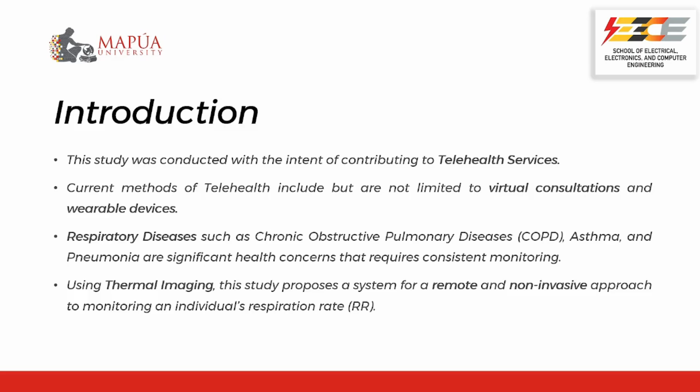Telehealth or telemedicine enables remote healthcare in the comfort of homes using video conferences as a medium between the patient and the medical professional. It is also critical for rural areas or any other location far from clinical facilities. To this day, it remains relevant due to its accessibility and convenience.

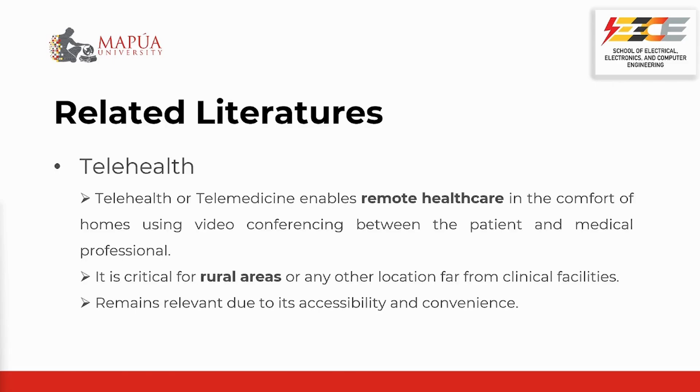Chronic illnesses, such as chronic respiratory diseases such as COPD, affect over 380 million people globally. Over 3 million lives are cut short due to its silent and non-communicable nature, making it the world's fourth leading cause of death. Other respiratory diseases such as asthma, pneumonia, and even sleep apnea require consistent monitoring.

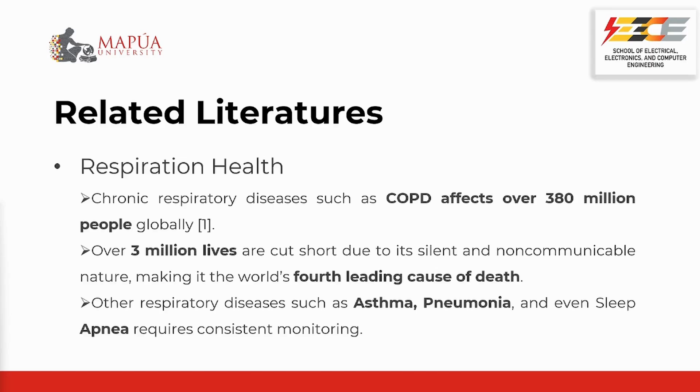There are studies regarding derivation of respiration rate, such as by Dela Cruz et al., where they use pulse oximetry to derive respiration rate from the heart rate. The signal processing techniques they use, such as the fast Fourier transform and Symlet wavelet transform, were used to estimate the heart rate and respiration rate. It is also worth mentioning that there has been little to no mention of studies with regards to using MLX, as they have strictly limited options to more expensive and high-end models.

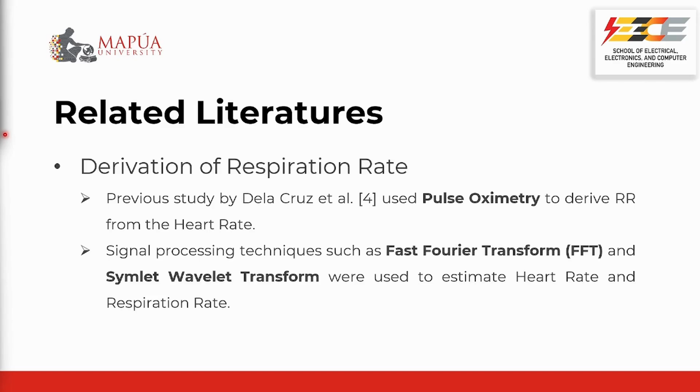Virtual consultations are not enough for effective respiration, health checkups, and patient assessment, since vital signs assessment and physical examination are used with medical tools to accurately assess patient health, which current telehealth services lack. Other high-end monitoring devices are usually used in hospitals or other specialized clinics.

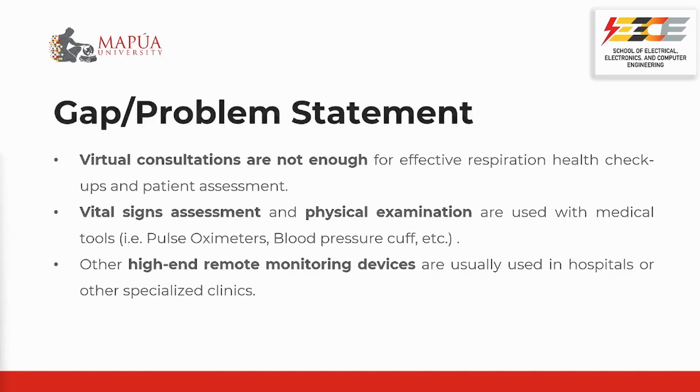The main purpose of this research is to develop a vision-based respiratory rate monitoring system using a thermal camera for added temperature reading. Specific objectives include the following: device calibration and determination of the optimum location of the thermal camera in the monitoring setup, to observe the changes in temperature waveform as the patient breathes in and out and collect temperature data. And lastly, extract and derive respiration rate from the collected temperature signal data.

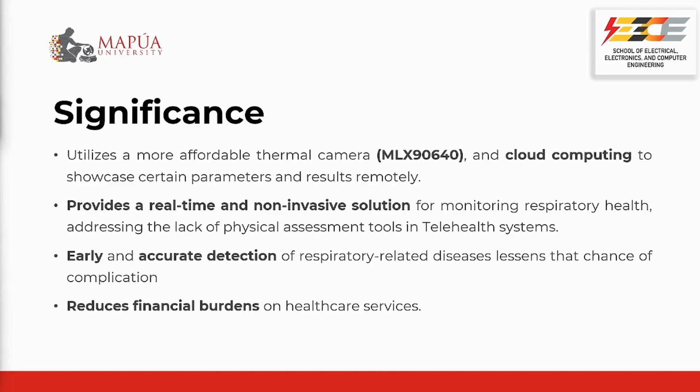The significance of our study is that it utilizes a more affordable thermal camera, which is the MLX90640, and cloud computing to showcase certain parameters and results remotely. It provides a real-time and non-invasive solution for monitoring respiratory health and addressing the lack of physical assessment tools in telehealth services. Also, as respiratory-related deaths continue to rise, primarily from COPD, early and accurate detection of respiratory-related diseases lessens the chance of complication, reducing the financial burden on healthcare services.

For our delimitations, this study will mainly focus on creating an ESP32-based infrared camera. The results will be compared to the conventional approach of determining respiration rate by manual counting through the rise and fall of the chest or abdomen. The RMSE score and percentage difference will be determined for the accuracy of our proposed system. The study is limited to providing quantitative data on respiratory rate through thermal imaging. Other physiological parameters such as blood pressure and acidity levels would not be included.

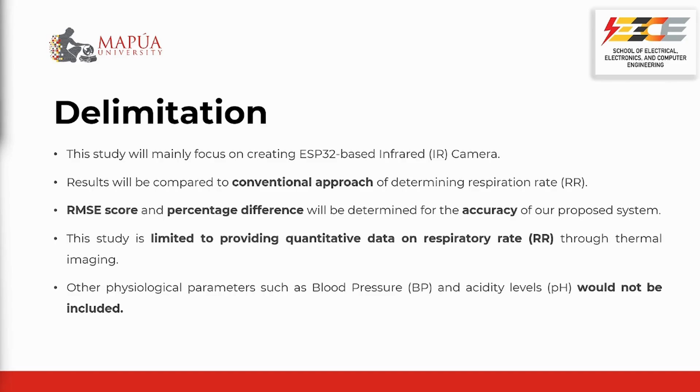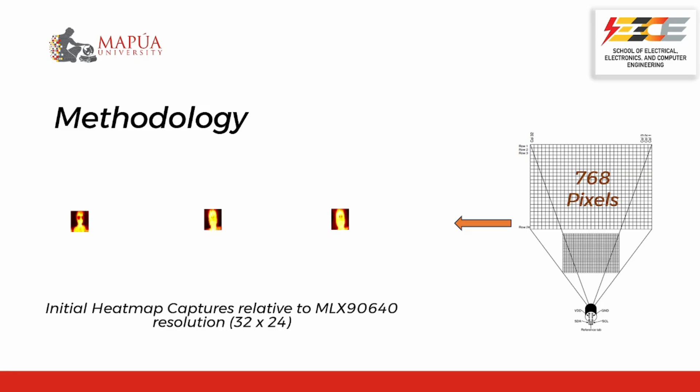Using Python's OpenCV, we can reshape these values into a heat map. However, due to the aforementioned resolution, the camera's initial heatmap captures are too small and not ideal for determining our region of interest, which in this case is the nasal region. We have decided to resize them to 170 by 205 pixels, giving us a clearer visualization of where the nasal region is located. A total of 1,690 thermal captures of similar size was used as our dataset for the nasal detecting YOLOv8 model, all of which were manually annotated using Roboflow.

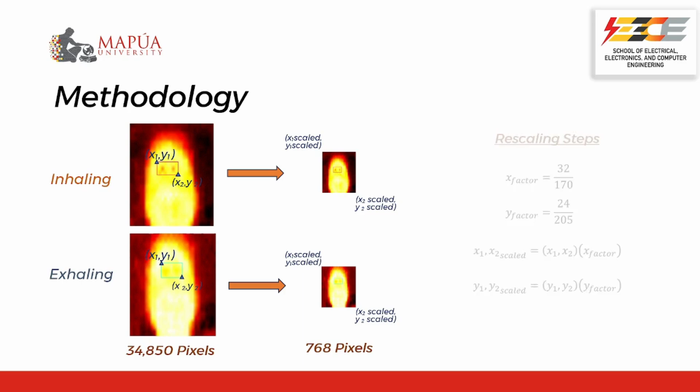So these are examples of the cropped images of the nasal region relative to the 32 by 24 resolution of MLX90640. As the system operates, it continuously captures heat map images of the nasal region. Each has distinct arrays representing the individual temperatures of their corresponding pixels. The size of these arrays varies based on the distance of the nose from the camera and the size of the patient's nose.

Whenever a detection occurs, we calculate the average of these temperatures and store them in a separate array. This array serves solely as a storage unit for future calculations. After 65 detections, the system invokes our custom respiration rate calculation function along with Python's pop function. The pop function ensures that the array maintains a maximum of 65 elements by removing the oldest entry. This allows the array to accommodate the latest average temperature readings of the nasal region while preserving efficiency.

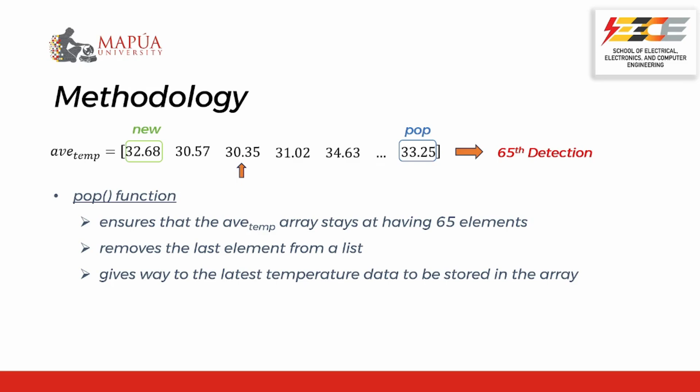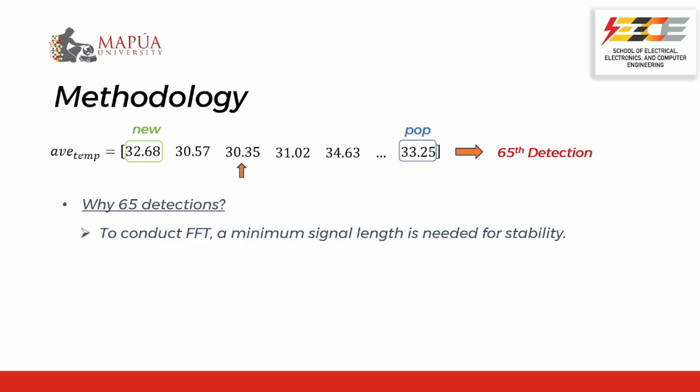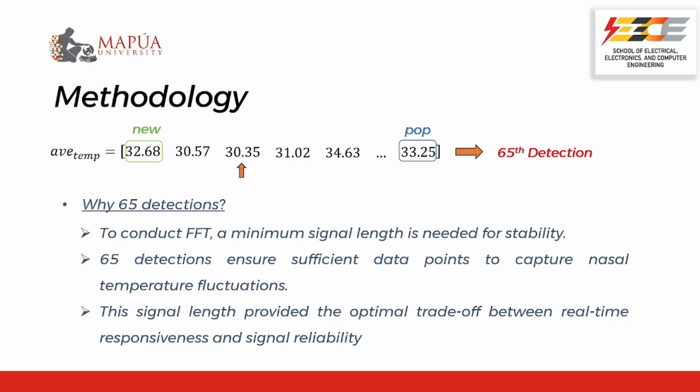We chose a minimum of 65 detections before calculating the respiration rate for the following reasons. A sufficient amount of signal length is necessary to perform an effective fast Fourier transform analysis, and with 65 detections, temperature fluctuations are adequately captured. And with this threshold, we achieved an optimal trade-off between real-time responsiveness and signal reliability. We now move to the final section of the flowchart. Here is an example of the acquired raw temperature signals over a 2-minute period. Each data point here signifies a nasal detection.

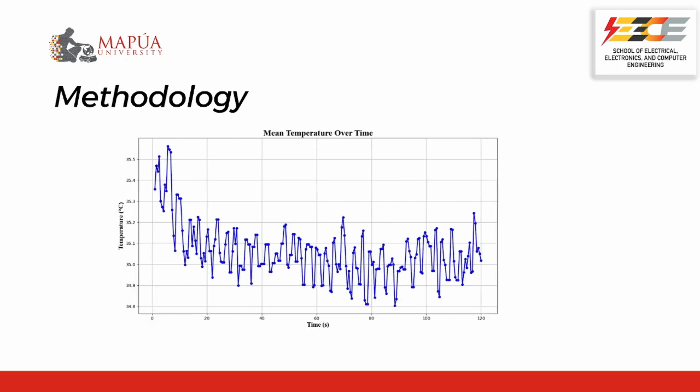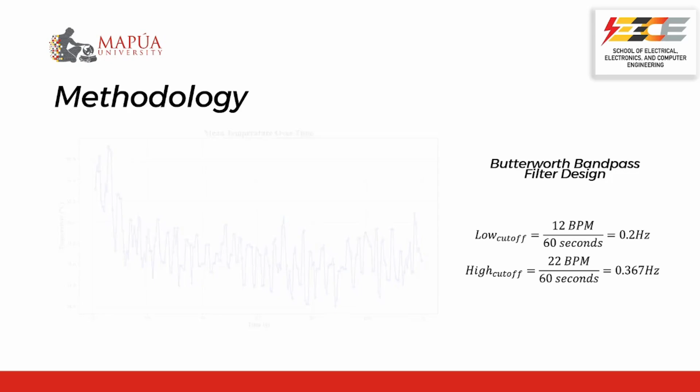The Butterworth bandpass filter cutoff frequencies were selected based on the normal adult respiratory rate of 12 to 20 breaths per minute, corresponding to 0.2 Hz to 0.33 Hz. However, to account for irregular or faster breathing patterns, we opted to extend to 22 bpm or 0.367 Hz to ensure that respiratory-related signals are captured while filtering out noise, enabling accurate analysis of temperature variations associated with respiration. This is the resulting output after applying the bandpass filter.

The next step involves performing the fast Fourier transform analysis to convert the time signal into a frequency domain. We applied a sliding window approach with a window size of 30 seconds and a step size of 10 seconds. This means that FFT analysis was performed on every 30-second segment of data. Afterwards, we shift for another 10 seconds before repeating the analysis. This process continues until the end of the 2-minute acquisition period.

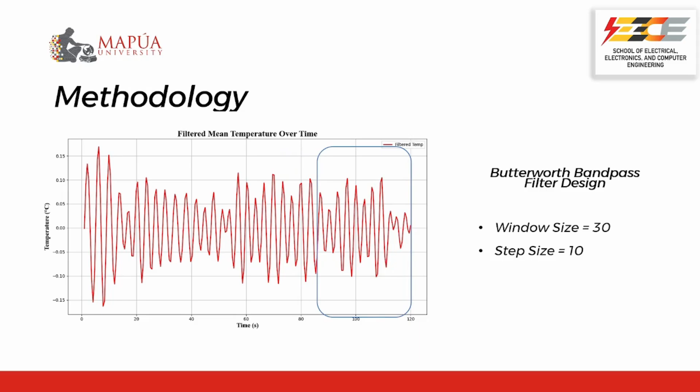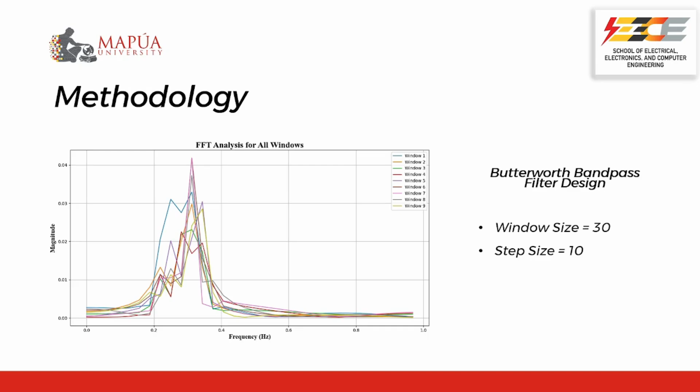Here are the resulting frequency magnitudes after signal filtering. The peak frequencies here, within the bandpass range, correspond to the respiratory rate in terms of Hertz. To convert this into BPM, we multiply these peak frequencies by 60 in order to get the respiration rate. And then finally here, we can see the respiration rate derived from the peak frequencies, providing us a means of monitoring a patient's breathing patterns over time.

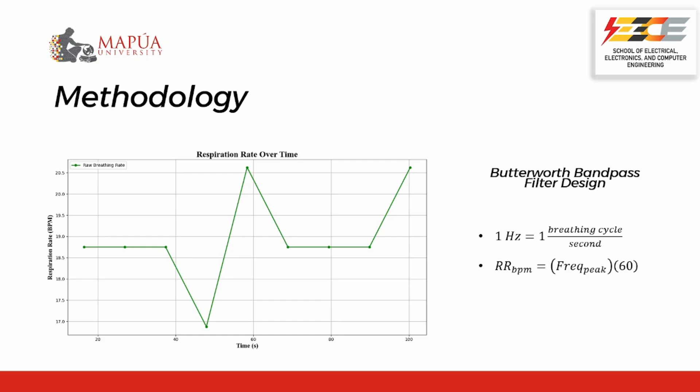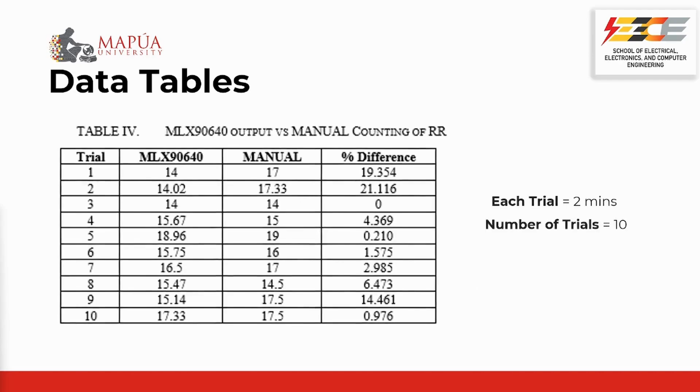Here is the result of our data testing, in which there are a total of 10 trials wherein each trial consists of 2 minutes. As you can see, the lowest percent difference that we achieve is around 0.21%. Significant deviations were observed in trials 1, 2, and 9 due to factors such as erratic patient movement, variability in breathing patterns, environmental noise, and the general hardware limitations of the MLX90640 thermal camera. Despite these challenges, however, the proposed thermal system achieved an RMSE score of 1.651 when compared to the conventional method of manually counting the rise and fall of a person's chest.

In conclusion, we successfully met the stated objectives of observing the temperature fluctuations in the nasal region, extracting raw temperature signals to derive respiration patterns, and providing visual and audio cues to effectively communicate system data to the user. The overall testing phase achieved an RMSE score of 1.651, with one test showing a difference as low as 0.21% compared to manual counting.

We recommend incorporating an industry-grade medical device for respiratory monitoring as a comparison tool, expanding the sample size to include a wider range of age groups, exploring alternative signal filtering techniques, and applying the same image analysis methodology with a more advanced thermal camera, in exchange of course for a more expensive model.